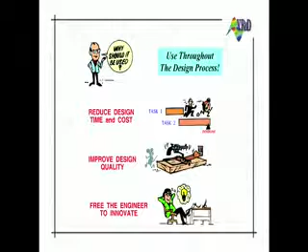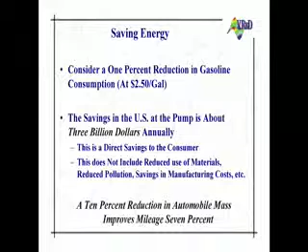Why use it? Reduce design time and cost, improve quality, free us to innovate and think the great thoughts we know God intended us to think. If we reduce the gasoline consumption 1% at $2.50 a gallon, we save $3 billion annually at the pump. That doesn't include all the additional savings in materials and so on. 10% reduction in automobile mass will reduce fuel consumption 7%.

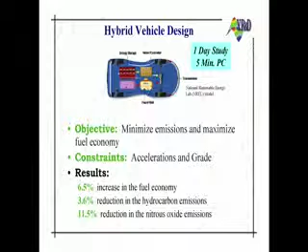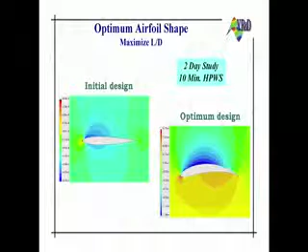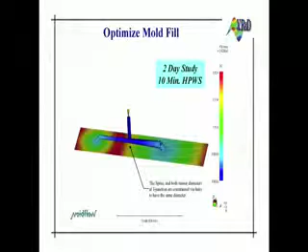An example, hybrid vehicle, one-day study, 5 minutes on a PC, increased fuel, reduced hydrocarbons and nitrous oxides, beginning with the best design NREL had created in several months of study. Airfoil optimization, a 2-day study, 10 minutes on an HP workstation. You want to optimize the mold fill so it fills at the same time at both ends. You may not want to do that, but if you want to, optimization can do that. It can also design the mold itself so that all this gooey stuff doesn't come squishing out the cracks.

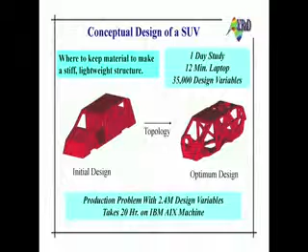Car body, in this case we want to find where to put material in an SUV to make it light and stiff. This was a one-day study, 35,000 design variables. In practice, in the stuff that we can't show, production problems are about 2.4 million design variables and take about 20 hours on an IBM mainframe.

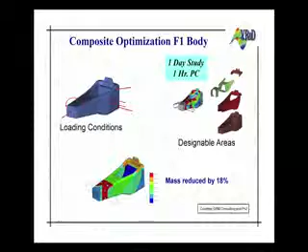Formula One people, Martin Gambling in Europe went to the Formula One people and said, I can reduce mass of these bodies, and they laughed at him and said, we spend our life doing that. He said, well, give me your best design, and if I don't impress you, I won't come back. Came back a day later with an 18% mass reduction, and the Formula One people today are virtually all using optimization.

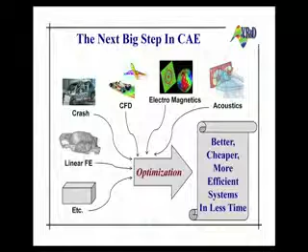So I think that I would argue this is the next big step in CAE or MCAE. We have very good analysis tools across the range of crash, linear finite element, CFD, et cetera. Optimization can change the inputs to those codes to improve the outputs. What we haven't done yet is really integrate that under a CAD environment. There's been steps taken at that, not complete, but we're on our way.

And I think that's the big step that's needed to make better, cheaper, more efficient systems in less time, and presumably improve the bottom line of the people using it. And we do see companies, I know one company that is now making standard practice that optimization be done wherever possible. So that's the story, and I'm almost a minute early, and yet I only have one thing left to say.